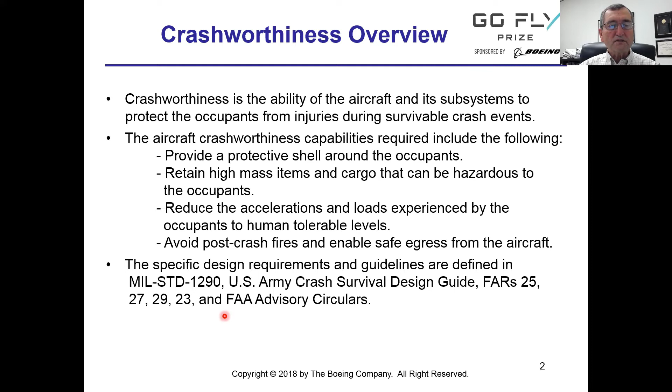In most crashes, of course, you never get a perfectly vertical or longitudinal crash. It's usually a combination of the two. In some cases, if the aircraft is yawed, for example, you might also get some lateral impact. But by and large, by segregating these into two areas, we can come up with design features that provide protection for those kind of scenarios.

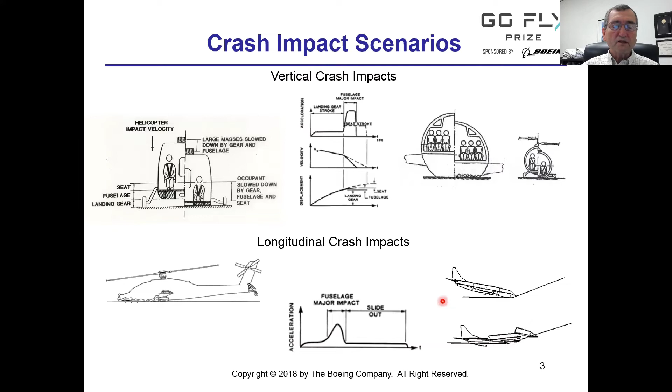So for rotorcraft, the most important subsystems for protecting the occupants, particularly for vertical crash impacts, which are the most challenging ones: we have crashworthy seats that allow the seat to stroke at a certain load level, typically between 12 to 14 and a half. We have fairly high energy landing gears that help to slow down the aircraft.

Now, we also have additional energy absorbing systems that are typically deployable. Those are called the external airbags, which I think are not only important for rotorcraft, but I think they're going to be very important for personal flying vehicles. And then we have crashworthy fuel systems that eliminate fuel spills and post-crash fires.

And then last but not least, we also do design features on the belly of our helicopters using crushable structures. These are sort of sacrificial crushable structures that provide some energy absorption to limit the vertical accelerations that I showed in the previous slide.

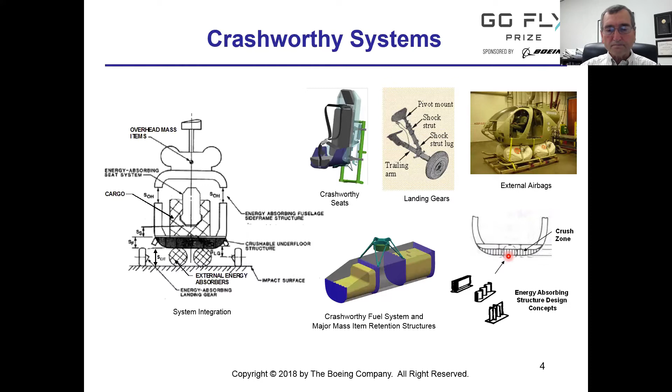So some of those subsystems, like large aircraft structures, very heavy landing gears, those kind of subsystems may not be available or may not be at that scale for personal flying vehicles. So I think if you want to think about the crash safety of personal flying vehicles, you really should think in terms of a more occupant-centric approach.

In other words, the focus is really just building a cocoon, if you can, around the occupant to protect them from crash injuries. Unlike for other systems or large aircraft where you have lots of structure to worry about, you can have large landing gears, which you may not have on the personal flying vehicles.

So in my opinion, the most appropriate crashworthy systems for personal flying vehicles: you obviously have some kind of seats. This could be a separate seat, or it could be a part of the personal flying vehicle itself, a tubular structure with hopefully some restraint system, where the restraint system is anchored to where the occupant is sitting. I would also think in terms of helmets, because as I will describe in a moment, head injuries are one of the injury mechanisms that you have to provide against.

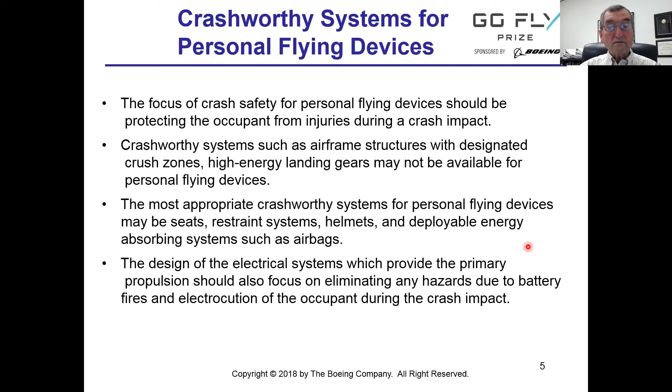The other injury to really consider is the head impacts. This is typically the head impacting some nearby structures, and this happens if the occupant is not properly restrained, or if you have structures so close that even if they were restrained, the likelihood of a head impact is very high. So to protect for those, you need to have helmets.

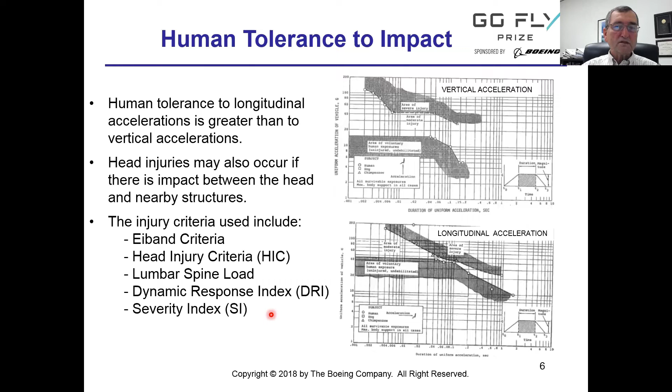Dynamic response index and SI, the severity index, are not very widely used, but these are some of the criteria. Certainly the dynamic response index came from the Air Force, associated with their occupant accelerations due to the ejection seats.

So there are a variety of seat designs in the aircraft. And really, the idea here is to make sure that, first of all, the seat is retained in the original position in the aircraft in the crash, so the seat doesn't come loose from the airframe. And if that happens, then of course, there's no way really to protect the occupant.

But also, in order to deal particularly with the high vertical accelerations, seats do provide an integral means of load attenuation in the vertical direction. This is typically associated with an energy-absorbing device that we provide that basically clips the 40, 50 G level acceleration down to more occupant survivable 12 to 14 Gs.

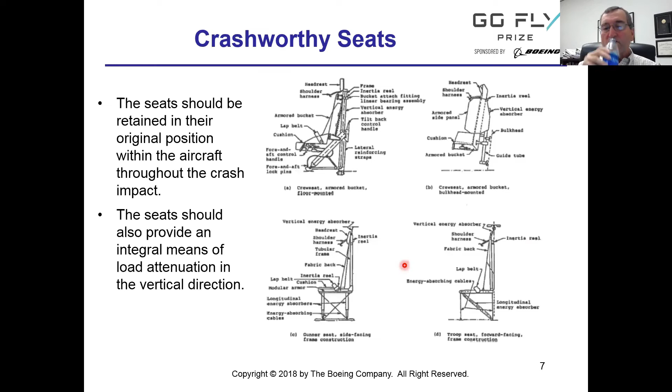There are a lot of restraint system manufacturers, both for aircraft seats and also, this is also very prevalent obviously in cars and mostly also in the car racing industry. They have very sophisticated restraint systems that can be adopted to the personal flying vehicles.

The other constraint, of course, is you can't just provide restraint in one direction. The occupant has to be properly restrained if you get a longitudinal, vertical, or a lateral crash impact, so it stays within the aircraft and then doesn't flail too far out to create a secondary impact with the aircraft interior. The webbing itself has to be, of course, wide enough to distribute the loads evenly onto the occupant, both on the torso and also in the pelvic areas.

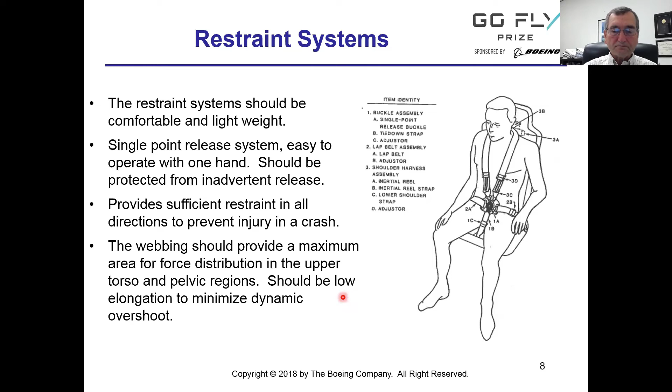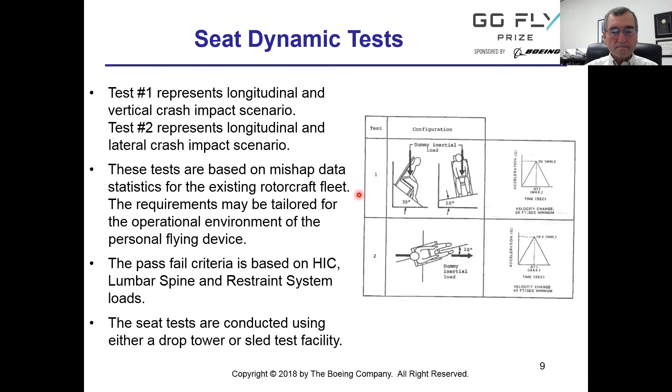Testing is expensive, so for qualification or certification, you may have to do some testing in the end, but it's much more cost effective, in terms of optimizing the design, to do analysis. There are a variety of analytical tools to model the dynamic response of the seat, occupant, and the restraint system in a crash environment.

The two tools that are most prevalent have both come from the automotive industry, since they're so concerned about federal motor vehicle safety standards, and they do a lot of testing. The two tools are LS-DYNA, which is an explicit finite element code that's marketed in the US, and also MADYMO, which is a little bit more of a sophisticated tool that is very specific to occupant dynamic analysis. LS-DYNA is more of a general purpose tool, but it does have very unique and useful features for modeling occupants as well.

As you know, there's a variety of sizes of occupants. So how do you design a seat to cover the entire range? We typically look at the largest size occupants, given by the 95th percentile male, and then the average is the 50th percentile male, and the smallest population is given by what's called the 5th percentile female occupants. The reason why these are important is that if you're doing testing, the anthropometric test dummies typically come in these three sizes. There isn't really somewhere in between. So you have to design for those cases, and there are standard dummies available for testing.

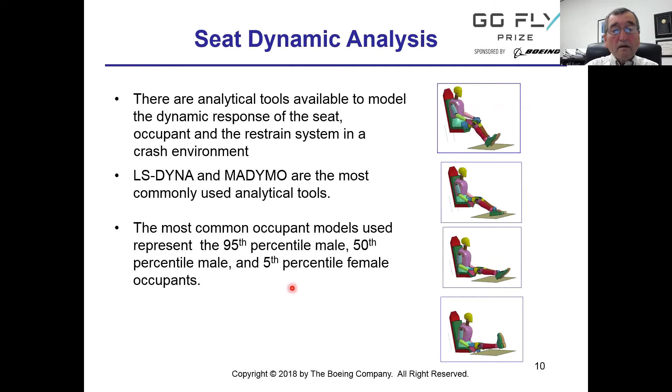So that brings us to the airbags. As I mentioned before, they can be used to protect the occupants during crash impacts. The rotorcraft experience with airbags has been in terms of providing internal airbags to restrain the occupant in place as a supplement to the restraint system. And also, as I showed on the earlier slides, you can use airbags to decelerate the entire aircraft by placing them on the structure. So they could be mounted on the structure around the occupant, or in some cases deployed as part of the restraint system.

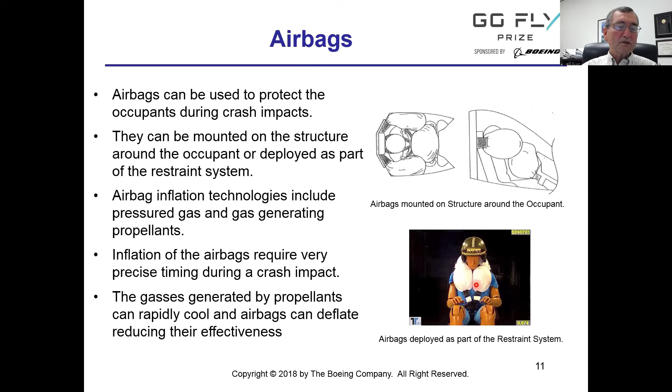So you need to test the airbags, of course, not just the inflation scheme to make sure that everything inflates, but also to validate that you are getting the required benefits. It typically requires some kind of a drop facility, although you don't have to have a very sophisticated facility. You can have short cranes or an existing structure to provide a drop test environment to validate the airbags. And also, just like for the occupant analysis, there are a variety of analytical tools that can be used to model the performance of the airbags.

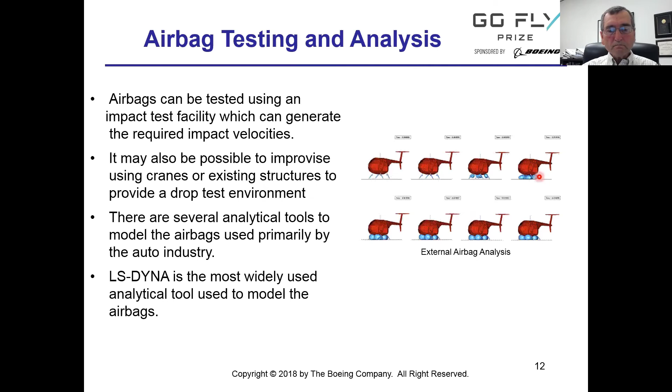So when it's all said and done, you obviously want to do a full-scale test to validate all the systems that you have built into your personal flying vehicle. That may include some structures that act as seats or separate seats. That may include external airbags. That would include the restraint systems and any other post-crash fire or electrocution avoidance systems you have. And that all needs to be tested on a full-scale crash test to make sure that you've integrated things properly and that they function as a system.

One of the things that we've learned many times is that even if you have subsystems that have been designed to function separately, perfectly, they may not work in an optimum manner when you integrate them as a system. In general, integrated systems are far more effective than federated ones, installing one or two safety devices that are not coupled to each other or don't take advantage of the capabilities provided by each other.

So one setup that we use is a combination of a drop tower and a guide beam. So if you think about a drop tower and a guide beam held at a certain angle, we raise it up to the desired height and the aircraft is pulled back.

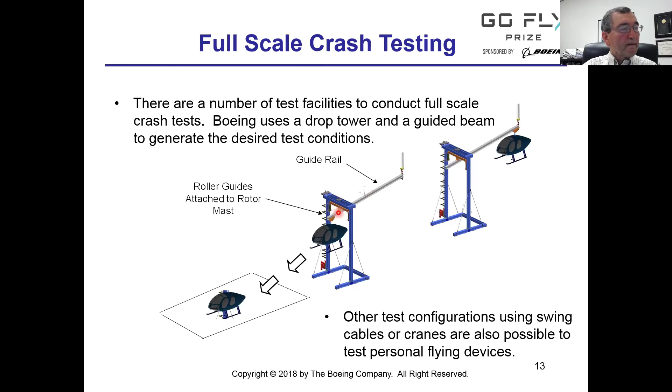So in concluding, I have covered a fairly wide territory there, but really, in my mind, the focus on the crash safety on the personal flying vehicle should be on the occupant in a very focused way. And I still think that seats and restraint systems, helmets, and some kind of a deployable energy absorbing system, such as airbags, are the most suitable crashworthy systems that we have experience with and technology for that can be adapted to personal flying vehicles.

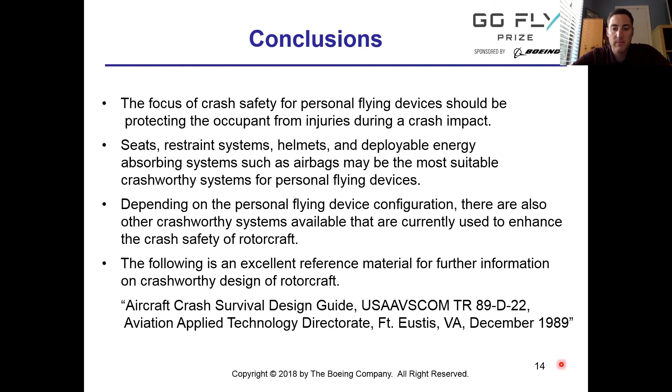Great, thanks. We can go ahead and jump into some questions then. So you talked a little bit about the military standard 1290A. Could you talk about what regulatory body provides certifications for that? Well, for military aircraft, or rotorcraft in particular, every program writes what's called a procurement spec, which will then reference other specs like the 1290 for crashworthiness. There may be a spec for handling qualities, etc. So it's sort of a reference material that the program specs either directly reference or extract material from.

Great. And you talked about a seated position, but there's quite a bit of design possibility in personal flying devices. So what about things like a short seat where you're sort of in a standing position? What other pilot positions, other than a standard seating position, would people have to consider when thinking about safety? Yeah, so if you don't have a standard seating position, if you're standing up and wearing a device, or if you're laying flat on the device, again, those things are not going to be suitable for a conventional seat.

But what I would recommend, though, is that you still allow for some restraint capability for the occupant, and also for those non-traditional kind of configurations. That's where I think the airbags would be most helpful, because you can deploy them from a variety of places. Even if you don't have a seat, you can still provide that load limiting capability for the occupants.